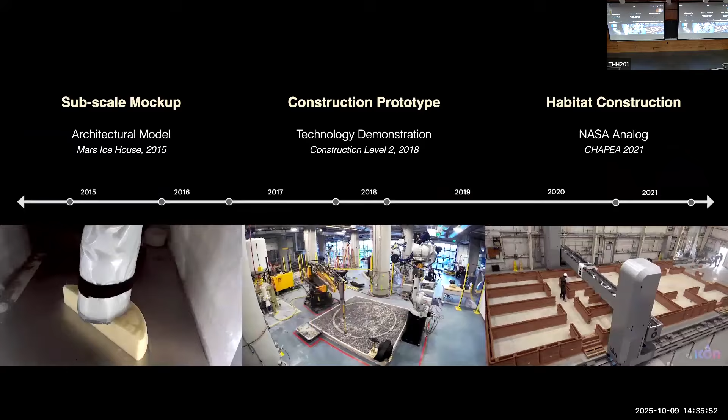So I started out, as an architect, really curious and enthusiastic about the potential of autonomous technologies to create habitats and to do large-scale construction. Over time in my career, I became more and more involved with providers in the actual technology development to develop these kinds of systems.

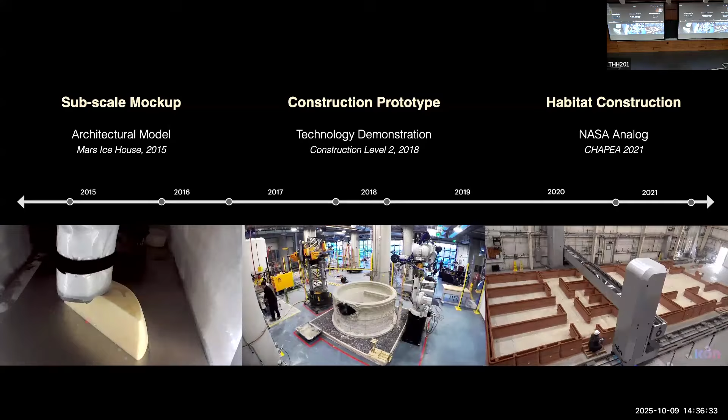And I'd like to tell you a little bit about how that brought me to working on the CHAPEA analog, the Crew Health and Performance Exploration Analog, which is the only 3D printed analog project in the world that's currently operational, and how it has informed some of the underpinnings of the wall assembly project that I'm developing.

So a little bit of background, NASA and others have developed a taxonomy of space architecture, which is what you see here. Essentially, they've developed this kind of categorical description of types of pressure vessels, which is more descriptive of how they're manufactured and where they're manufactured. So class 1 type space architecture is primarily composed of hard shell vessels, steel, aluminum vessels that are pre-manufactured here on Earth and then launched into space, quite like the ISS was.

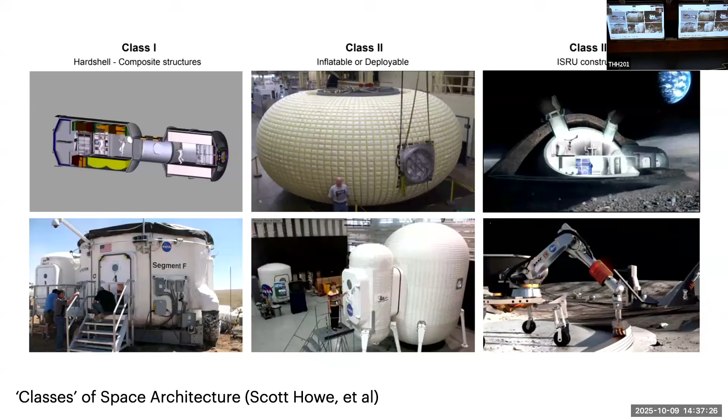Class 2 refers to a deployable type of structure, like an inflatable. And Class 3 is an in situ resource utilization constructed habitat. So we're talking about using local materials on the surface of the moon and Mars. Predominantly, we're referring to regolith, and engineering that material and processing that regolith to create high-performance construction materials.

There are a couple of processes that we're really interested and excited in for the sake of using in situ materials on Mars when it comes to creating habitats and when it comes to creating various kinds of... I'll speak to that in just a second.

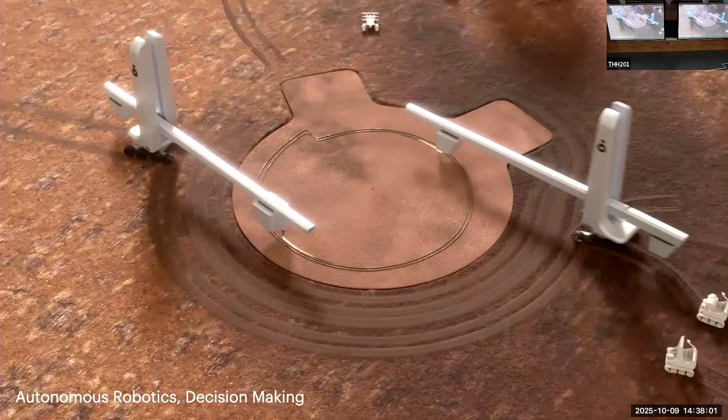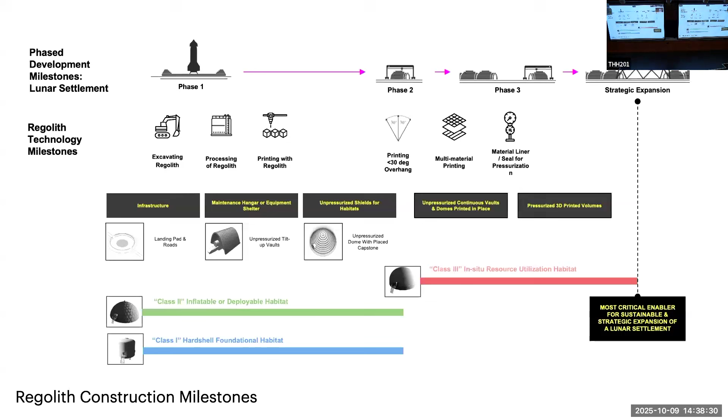So a lot of what I've done in my work delivering not only terrestrial, large-scale, additively manufactured structures, but imagining the construction sequence as it would be deployed in space is a lot of building information modeling and construction task sequencing to imagine what the role and responsibility of different robotic agents will be and how exactly humans can stay in the loop and stay informed in supervising those kinds of activities. I'm going to skip this for the sake of time.

So some of my past work has been in response to NASA's 3D printed habitat challenge. 10 years ago, I was part of a team that won not only the first phase of that project, but also the third phase of that project. So we were very successful in this challenge.

And it launched an entire career trajectory into thinking about 3D printed habitats, not only in space, but also for how they may be constructed in the short term here terrestrially within the housing market and within the commercial sector. And I'd be happy to speak towards that for anybody who's interested in learning more.

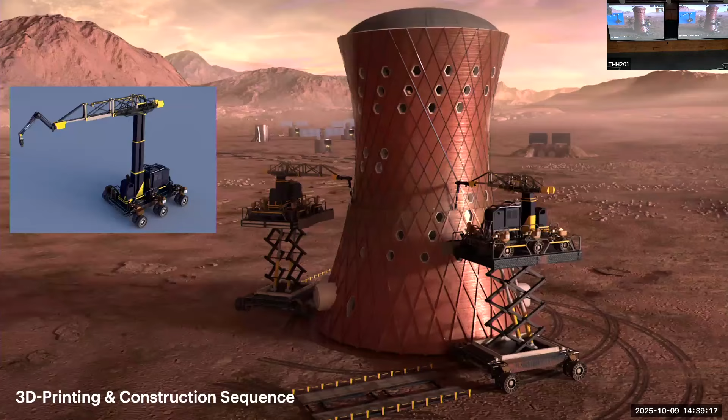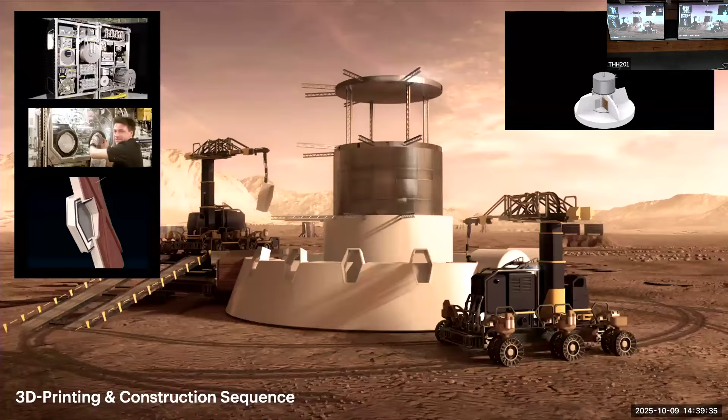So a lot of this work, imagining 3D printed habitats on Mars and the moon, had to do with coordinating, again, a construction sequence that a robot of a certain form factor with certain capabilities could actually execute, and then imagining what the livable space would be for a pioneering crew of 4 or 6, depending on the reference architecture and the mission, and then autonomously construct this with the support of other site support robotics, other robotic agents, and ensure that the habitat is certified for human occupancy.

It's no small feat. This is a very ambitious thing, and we're breaking apart the problem in segments, I would say, to address different aspects of this challenge. And it's starting with terrestrial construction. Terrestrial construction is really the best way to approximate construction at scale in the here and now.

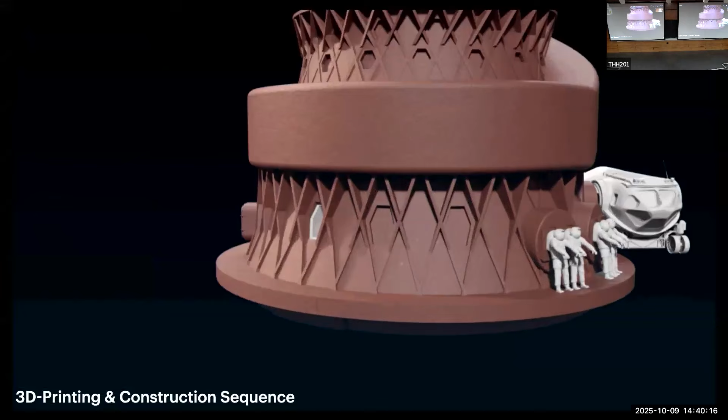So some of the things that we've explored in prior projects include the wall assembly of the habitat. What is the primary mechanism by which we're containing pressure so you can live in a shirt sleeve environment? How are we actually going to work and build with regolith, which generally speaking performs better in compression than it does in tension, so it's not very well suited to containing pressure?

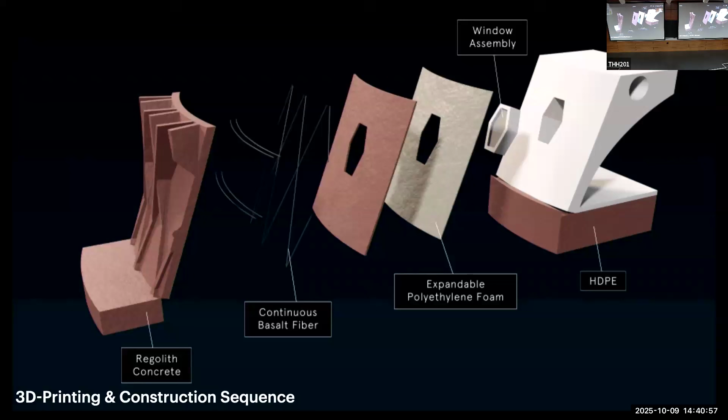How are we going to engineer rebar if we need rebar on Mars? What will that process be? What will the mechanism be? And are there other thermal materials that we need to think about engineering on the surface as well? These are some of the questions that are relevant to designing a habitat system, a wall system that can perform over the long term on Mars.

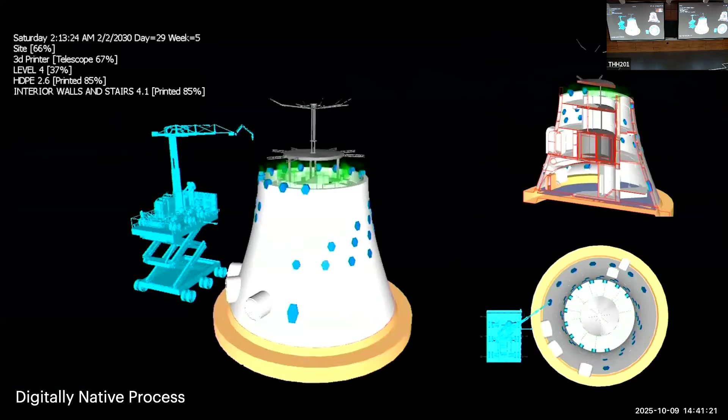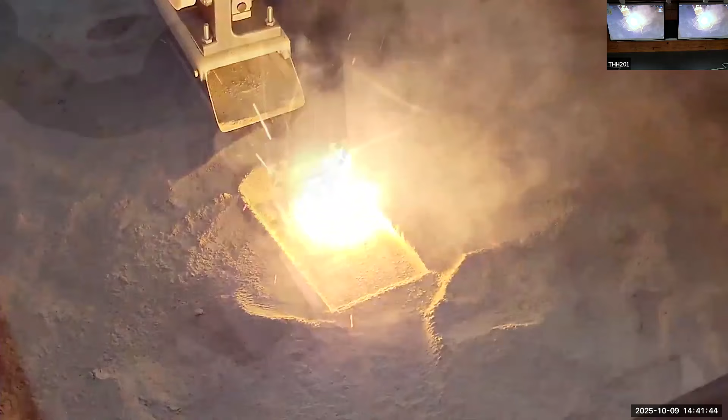So these, again, are examples of past work, examples of simulations we've created to show how different material systems and also pre-integrated systems like your ECLSS, like windows, like airlocks, etc., can all coordinate within a construction sequence that can factor in contingency when things go wrong, that can factor in autonomous decision-making by robotic agents who may or may not have awareness of what other activities may be at the site. And we're only in the beginnings of this work, but this is, again, to provide some conceptual underpinning for what's to come.

There's a couple of leading methodologies for additive manufacturing on Mars. One of them is sintering. This is an example of sintering using lunar regolith, so not Martian regolith by any means, but it's a similar process. You're essentially using directed energy deposition to fuse particles together and to create a tight bond.

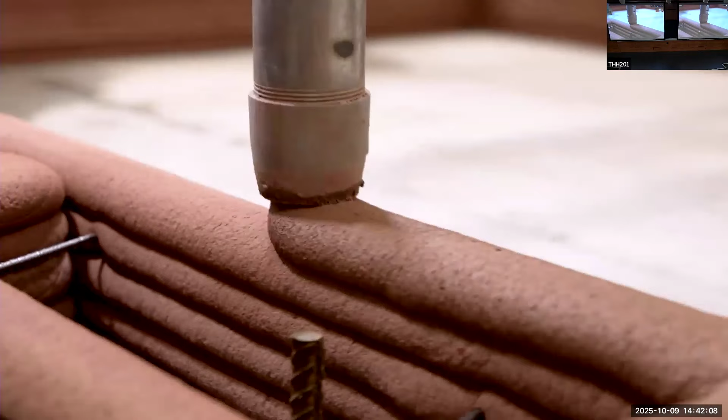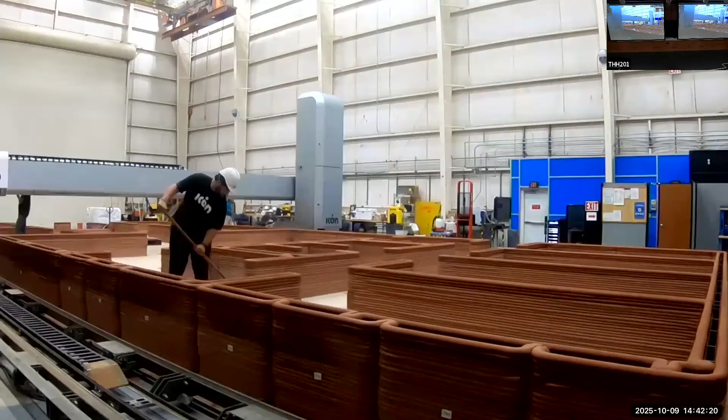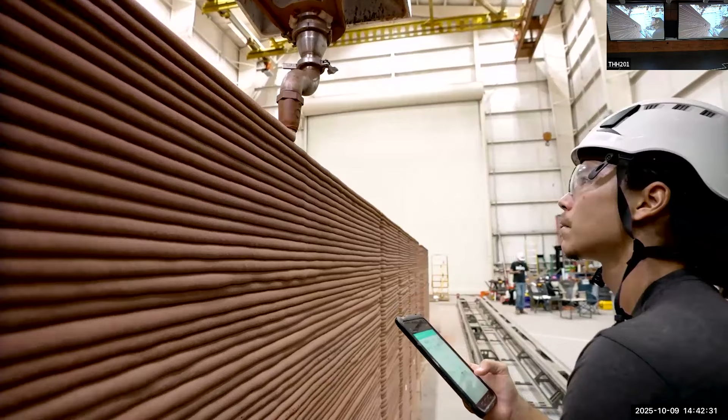The other two processes that are currently being considered, or that have high applicability for Mars, include geopolymer-based concrete, for which geopolymers and alkali activators you may have to bring from Earth. But terrestrially, it's very, very similar to additive manufacturing as we're currently doing it within the housing sector and within other sectors here on Earth. So that's what that looks like. And then the last method that's being considered is sulfur concrete. So basically using local sulfates on Mars to engineer a new kind of heat-based concrete.

This brings me to one of the most, I would say, applicable projects that has been completed in recent years, the 3D printing of the Crew Health and Performance Exploration Analog at the Johnson Space Center. We responded to a request for proposal in 2020 to demonstrate that we had the capabilities to 3D print an analog project. And this is the result of being awarded that project, is that we were able to work with NASA to design the habitat itself according to the requirements of the analog.

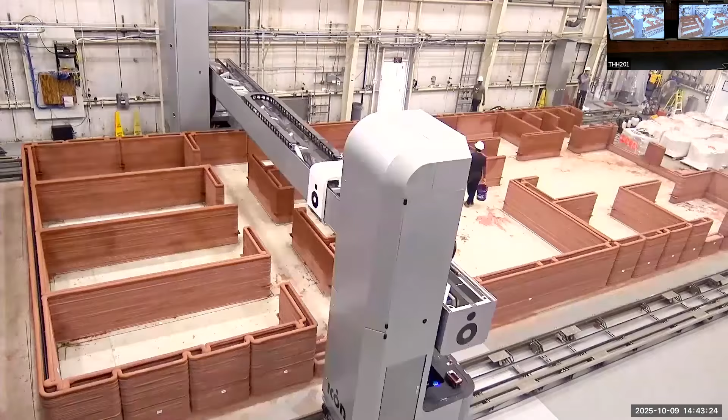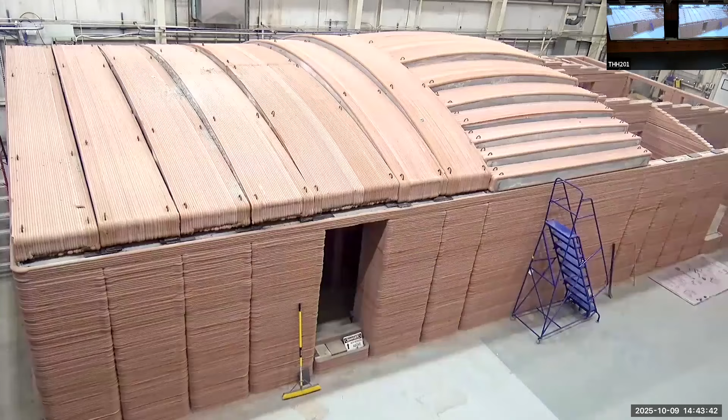And it's currently in its second mission. The analog is intended to be operational for 3 consecutive missions. The first one concluded last summer. I believe the second one is currently in progress. And 4 crew members lived in this structure for a year. And what can I say? We don't have too much data yet.

There's not too much published on the results of the analog just yet, but I'm very, very eagerly anticipating what the results of the analog are and what will be shared. Although there is a podcast, it's a good one.

So this is how the analog was designed, and the program that was provided in the analog. You have 4 crew quarters, a recreation area, a kitchen area, a workroom, fitness area, robot simulation and communications room, as well as a medical treatment room.

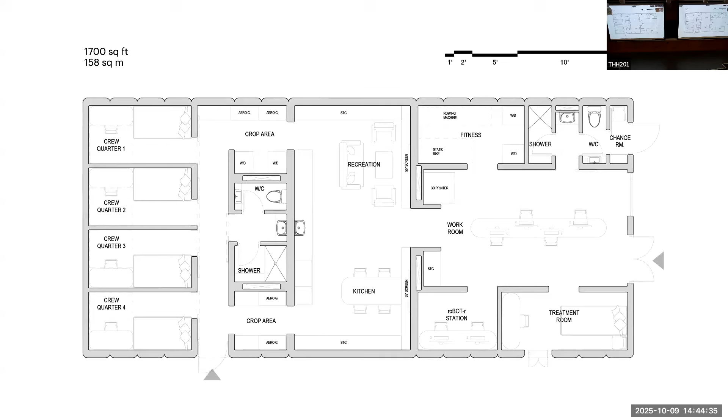You would be surprised how many aspects of this analog's construction we did not have good answers for. We did not have good requirements for. And it begs the question, are we really prepared? Like, if we can't do this on Earth, can we truly do this in space? And some of those examples I'll speak to, and some of them I'll reference in upcoming slides.

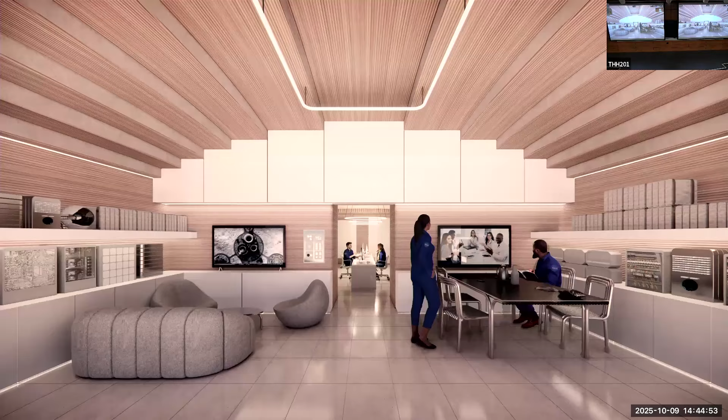So it's a 1,700 square foot structure. It's pretty compact. Leaves a lot to be desired in terms of finishing, but that's where my new project picks up, is resolving some of the open questions which this analog was not able to answer.

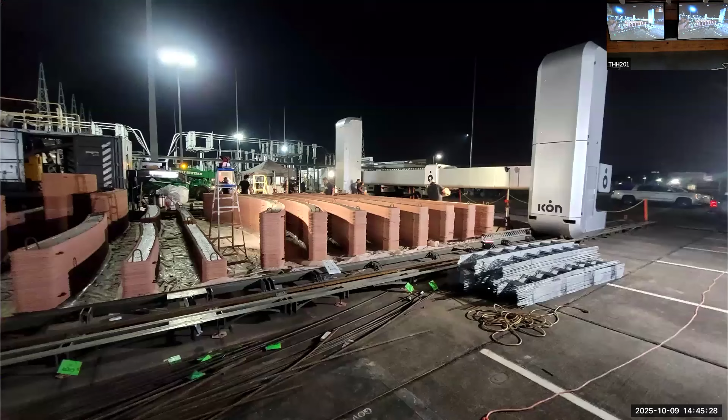And there are many. So one of the things that we did that was unique in this project was 3D print a roof, and we were able to use the overhead crane at the Johnson Space Center to lower those roof panels on top of the structure itself. It did not need to be pressurized, which is a whole other story. James mentioned earlier the challenges of creating a pressurized environment within an analog. So that was not a requirement for NASA, and it was not a requirement for how we constructed this. And again, it is a research gap for us to continue investigating.

Utilities. So this is a huge aspect of our project. We don't yet have a good way of integrating utilities and resources for air, water, etc. within autonomously constructed habitats, let alone regularly constructed habitats. Repair and maintainability of these systems is going to be absolutely paramount.

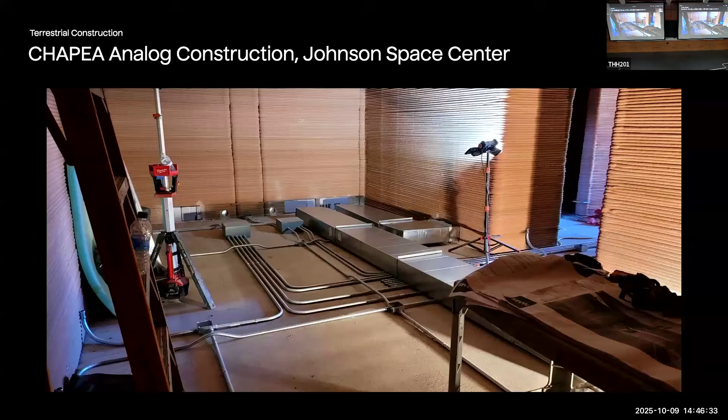This came up in the CHAPEA analog. They had to repair the toilet. They didn't have a good way how, and the construction of the analog itself was not well suited for those kinds of repairs and those kinds of inspections and maintenance. So that's a huge gap right there.

Same for things like a material pass-through. If we're going to actually be doing geological work on regolith, we need a safe, reliable way to actually pass through materials into a lab, a pressurized area, where the crew will be to actually do that kind of work. So integration with airlocks, rovers, suit ports, materials pass-throughs, these are all things that we have open questions that we're currently addressing in our work.

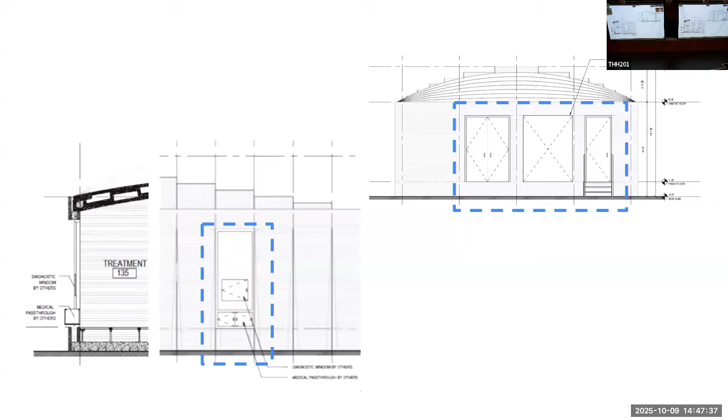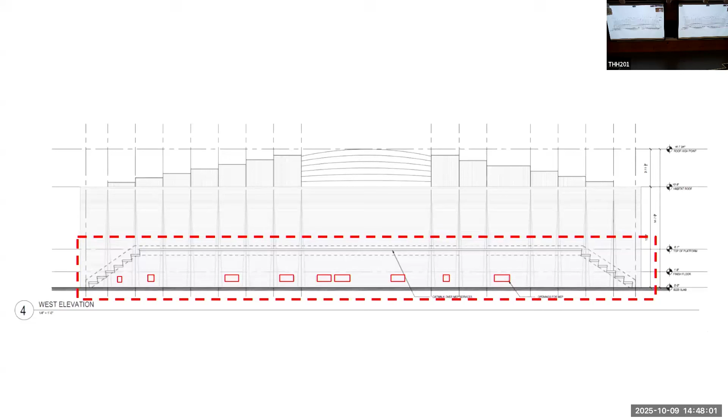And I would be super happy to talk about this if this is of interest to you and take any questions. Thank you.